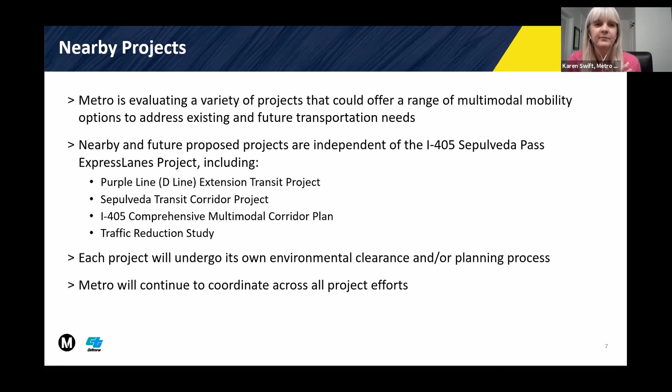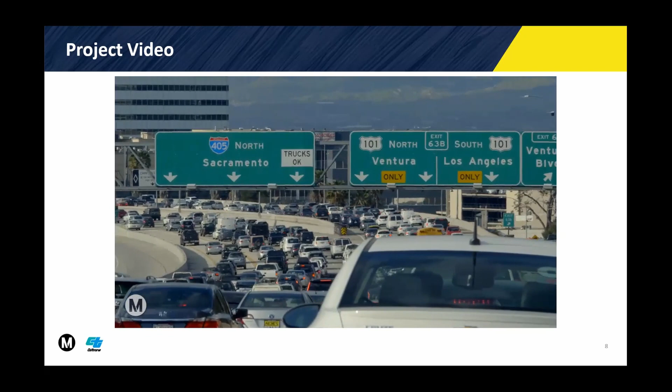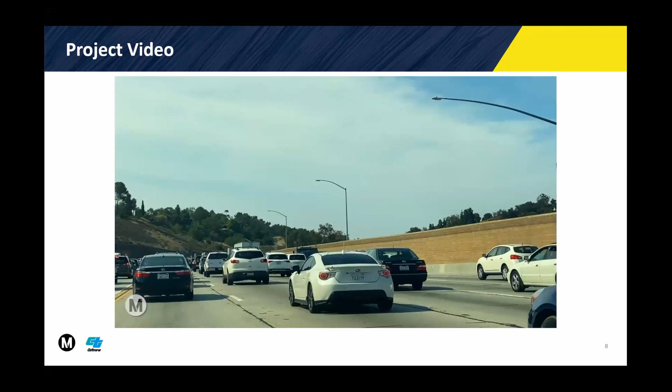So I live in Sherman Oaks and I work in Santa Monica. My commute to work is only about 20 miles, but with traffic, it takes 60 minutes or more. I work downtown and I have to come from Canoga Park, so I have to take the 405 to get to work. Dragging a horse trailer over the 405, it's just a nightmare. It takes time away from your life. If I wake up late, then it's over. You have to leave so far in advance. Sometimes it can literally take 2 hours to go 5 miles over the Sepulveda Pass. My boss is not very happy with me if I'm late, but unfortunately, it's the only route I could take to get to my destination.

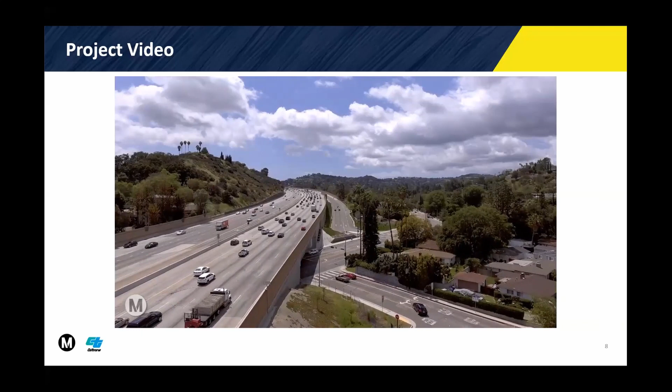The 405 freeway is one of the most traveled in the nation, with traffic increasing each year as our economy and population grow. That's why Metro has a plan to make it easier to get around. The 405 through the Sepulveda Pass is especially challenging and complex, and will need more than one project to improve travel in this area. Along with better transit and other improvements, Metro is planning express lanes for a better drive on the 405.

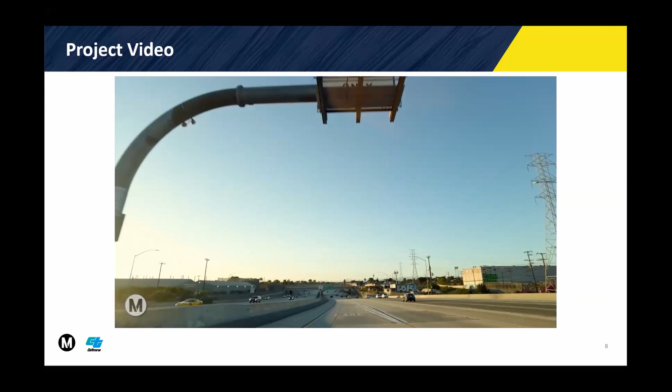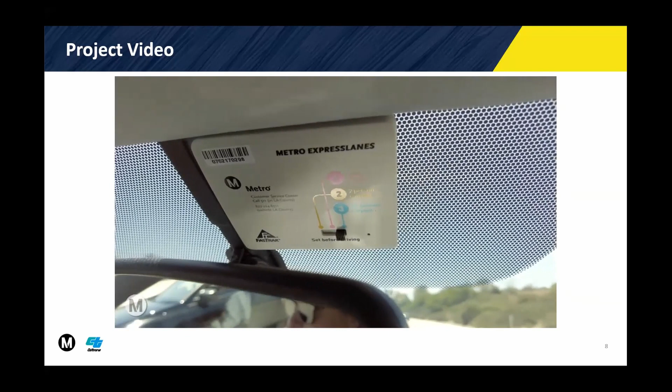Express lanes are managed lanes where toll prices are based on real-time traffic conditions and vary according to the level of traffic congestion using dynamic pricing. To use express lanes, you'll need a FasTrak Flex transponder connected to an express lanes account. Dynamic pricing means that the toll is higher when there is more traffic in the express lanes and lower when the traffic is lighter.

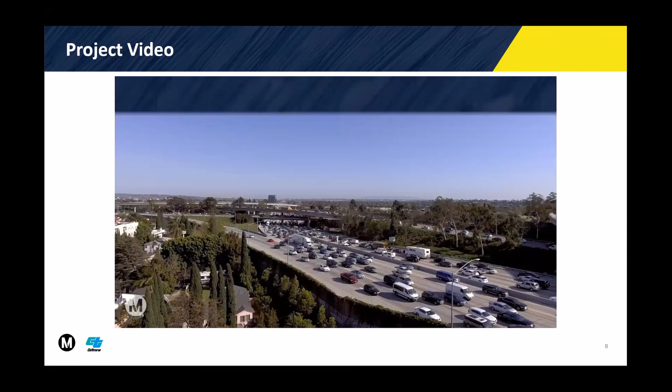Lanes are free for qualified carpools, van pools, and transit vehicles, and tolls are discounted for qualified clean air vehicles to move more people in fewer cars and encourage sustainable travel behaviors. This can help keep traffic in the express lanes flowing smoothly for a more reliable trip.

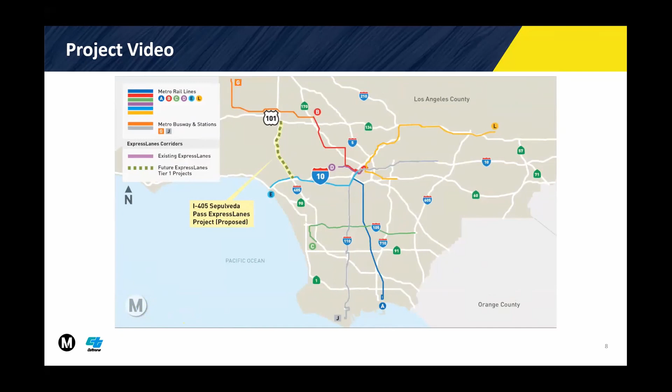The I-405 Sepulveda Pass express lanes have $260 million in funding from the Measure M half-cent sales tax and would add express lanes between US 101 and I-10. These new lanes would expand the existing network of express lanes.

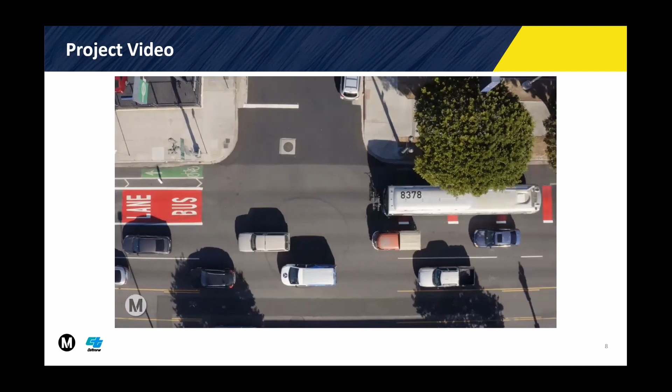Revenue from express lanes tolls fund the operational costs of the program, with any leftover revenue invested into the corridor. This net revenue could potentially fund more frequent transit service and toll credits for transit users. Historically, this net toll revenue has also been used for local transportation improvement projects within 3 miles of the corridor.

The combination of being able to get someplace faster and with less stress on the express lanes, that's just a win-win. So you have a flight that's right at the pinnacle of rush hour, and there was an express lane? Yeah, I would use an express lane, no problem.

My coworker and I commute together so that we can ride in the carpool lane. Having an express lane would definitely benefit me and my coworker.

If I could get credit on my transponder every time I took the subway or the metro, then I would definitely use that. And when I have to go to the Inland Empire with my horses, then I take the express lanes on the 10.

It's a dramatic savings in time and stress. Do it. Anything to make it better.

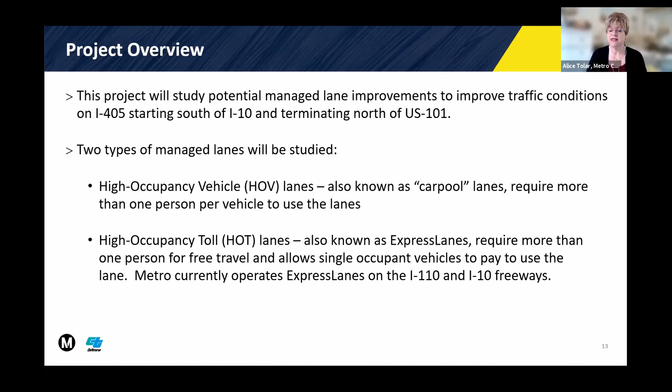Metro currently operates express lanes on the I-110 and I-10 freeways.

The I-405 Sepulveda Pass Express Lanes project is a 14-mile corridor within Los Angeles and unincorporated areas of LA County. We recognize this is a regionally significant project and corridor that impacts jurisdictions beyond the defined project limits. Metro and Caltrans are partners in developing the project. Metro is preparing the planning reports and environmental document, while Caltrans provides oversight and is the lead agency for CEQA and NEPA.

On funding, Measure M is the local sales tax passed by LA County voters in 2016, which provides $260 million for this project. Additional funding sources will be identified as the project advances through the development process. Operation is anticipated in advance of the 2028 Los Angeles Summer Olympics and Paralympics.

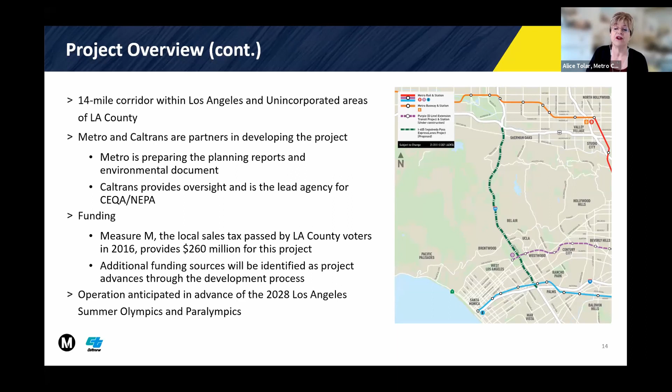A bit of background on the Express Lanes program: for Metro, it was initiated as a one-year congestion reduction demonstration project on the I-110, which opened in November 2012 between Adams Boulevard and State Route 91 and 182nd Street, and also on the I-10 in February 2013 between Alameda Street and I-605.

These express lanes were developed in partnership with the Federal Highway Administration, Caltrans, and California Highway Patrol. The successful program prompted the Metro Board and California Legislature to grant tolling in perpetuity.

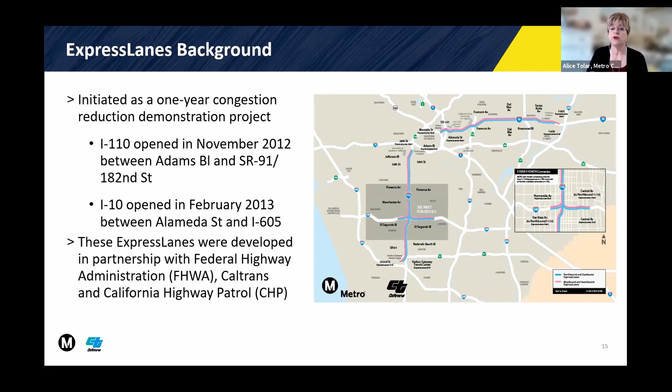Due to the success of the program, the Metro Board directed staff to produce a county-wide express lane strategic plan, studying HOV corridors in LA County and ranking them on factors including technical and physical feasibility, financial feasibility, and opportunities to close gaps in the network. Corridors ranking highest and considered most promising were placed in the Tier 1 near-term implementation category, defined as projects that could be implemented within 10 to 15 years. The I-405 Sepulveda Pass Express Lanes project is one of those Tier 1 projects.

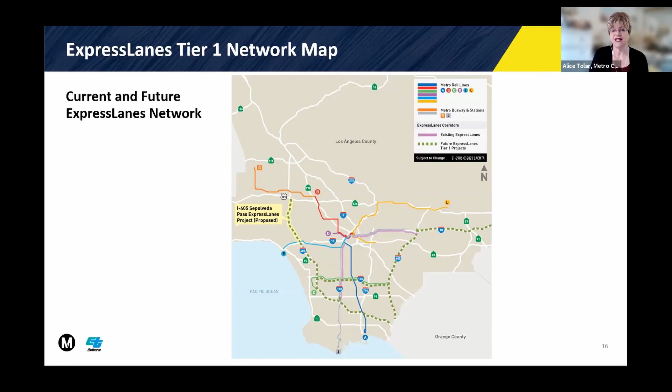Metro Express Lanes are designed to improve traffic flow and provide motorists, including solo drivers, a more reliable travel option in LA County. Express lanes allow carpools, vanpools, and buses toll-free travel with a FasTrak transponder, while also providing single occupancy vehicles the option to pay a toll to use the lane.

Tolls for vehicles that don't qualify for free travel are calculated based on traffic congestion and vary according to the level of congestion, so tolls are higher when congestion is heavier and lower when traffic is lighter.

Looking at this cross section, for those who may not be as familiar with an Express Lanes facility, we show the Express Lanes facility alongside the general purpose lanes. In the lower left-hand corner, labeled number 3, safety is the number one priority for Metro, including with respect to our Express Lanes facilities.

We want to make sure we adequately inform motorists that the ability to enter or exit the facility is coming up. Signs are in place to let folks know they will have an opportunity to remain in the general purpose lanes for the duration of their trip, or choose to utilize the express lanes, giving advance notice so they can make safe moves in and out of the facility. We also want to make sure we include pricing signage, which typically shows the toll associated with utilizing the facility to access the next destination.

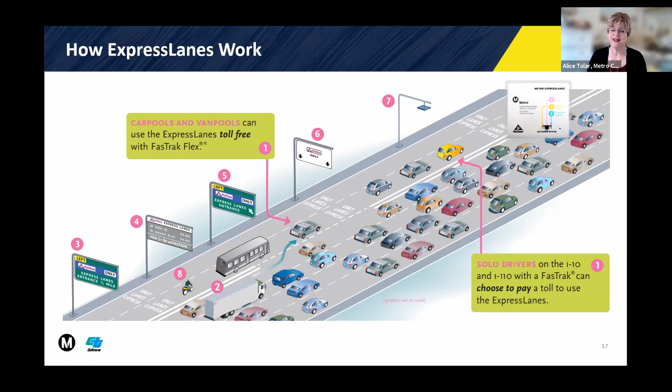So the purpose of the I-405 Sepulveda Pass Express Lanes project is to reduce congestion and improve the overall movement of people and goods on I-405 by providing additional mobility options, improving traffic flows and operation, reducing congestion, and improving overall performance within the constrained project corridor.

Also, we would like to increase the continuity of the regional priced managed lanes network by closing the gaps between existing and planned facilities.

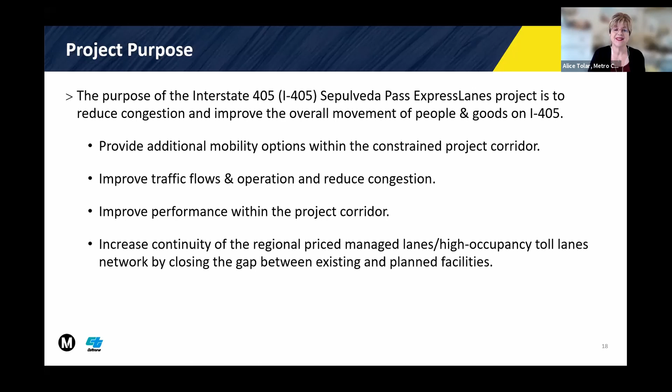So let's talk about the I-405 generally speaking. The I-405 between I-105 and US 101 is one of the most congested highways in the US, with an average of 56 hours of delay yearly per commuter in 2019. The project is needed to address traffic congestion and related deficiencies.

What we know about the corridor is that much of the congestion in the constrained Sepulveda Pass can be attributed to limited existing roadways and limited alternative transportation options, running north-south through the Santa Monica Mountains between the San Fernando Valley and the South Bay/West Side in LA County. Currently, daily traffic volumes of 289,000 vehicles most definitely exceed capacity.

And much of the existing I-405 facility within the project limits is classified as extremely degraded. I wanted to chat just a little bit about this concept of being degraded.

So much of the I-405 HOV lanes within the project limits are not performing as originally intended, as they do not offer trip reliability, travel times, and travel flow, nor productively or proactively manage and sustain mobility within the corridor. The Express Lanes project seeks to ease highway and local congestion, providing a mobility alternative to carpools and vanpools, and choices to single occupancy drivers.

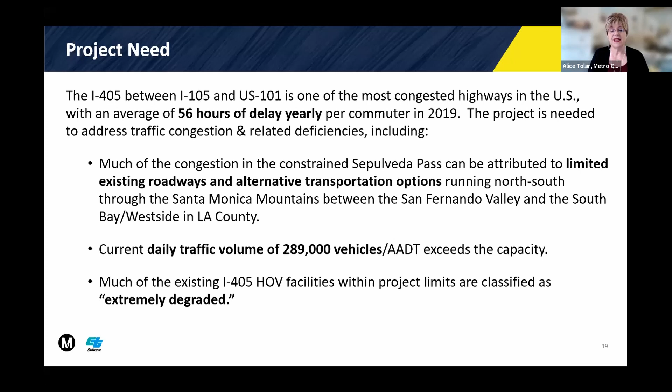So again, much of the existing I-405 HOV facilities within the project limits are classified as extremely degraded.

What I'd like to do now is hand the mic over to our colleague, Jeff Fromhertz. Jeff is from WSP, and they are the technical consultant working now on our current phase of the project, our environmental and project report.

Thank you, Alice. And I think it's still technically good morning. Good morning, everybody. As you've seen the project limits on exhibits that Alice was showing, we just wanted to provide a different perspective, looking at it as an aerial view.

If we split the corridor for the most part into thirds, the southern third, what we're looking at here, starting with the I-10 freeway to the left, is before we go up the grade, still fairly flat, and as you can see, very urbanized between where the Expo Line crosses.

You can see where Santa Monica Boulevard and Wilshire Boulevard are, and we have a few very important features along this stretch of the corridor, including, to the west of the freeway, the VA complex just south of Wilshire Boulevard. We have the National Cemetery just east of the freeway, north of Wilshire Boulevard. We also have the Bad News Bears baseball and softball complex right up against the freeway itself.

So it's a very urban area. These are just some of the conditions we'll be looking at as we develop our preliminary designs, and we'll get into the alternatives in a minute.

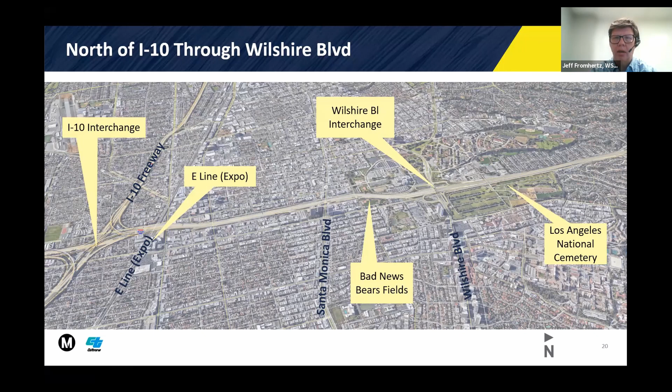The next slide shows basically the middle third of the corridor as we're starting to get up the grade going northbound, with Sunset Boulevard to the left. We have the Getty Center, the entrance, and the museum itself on the west of the freeway. We have some large water tanks near the top of the grade that serve the communities, and some existing retaining walls that were recently built. We also have the Skirball Cultural Center to the right of the photo here. So this is basically near the top of the grade, through the grade.

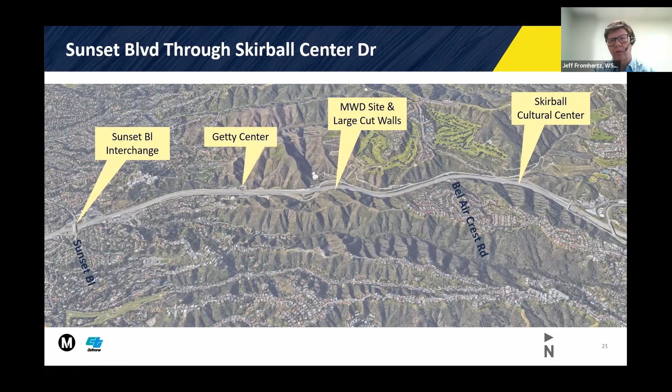The next third, the northern third of the project, on the next slide you can see coming down the grade, again gets into a very urbanized condition at the bottom of the grade. We have the Mulholland overpass that was built as with the last project. We have Sepulveda Boulevard that traverses, for the most part, parallel to the 405, either on the east or west side of the freeway. It does cross several times underneath the 405. Our northern limits are at the 101 interchange where Ventura Boulevard crosses over, and the mall. Just north of our project limits is where the Sepulveda Basin and the LA River cross under the 405. So that's just to give you a feel of the project conditions.

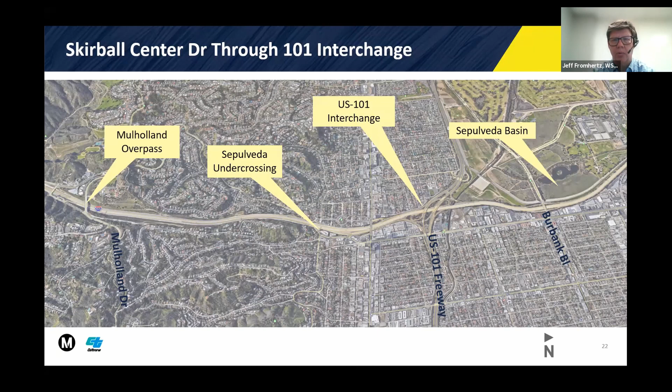Now the next slides, we're going to talk about what we're planning on studying during this environmental phase, as Alice was mentioning. What we start with on environmental documents is called the no-build alternative, or alternative 1. The no-build really represents the existing conditions that's out there today. But we do look at how the existing conditions will perform, not just today, but in the future, as we compare our other alternatives. So it represents what would happen if no action was taken. It provides a comparison point to understand how the impacts of the other proposed alternatives compare to the no-build.

Currently we have 4 build alternatives under preliminary consideration. The point of these meetings, and today's meeting, is to get some input and comment. This doesn't mean these are the only alternatives we're going to study for the project, but these are the basic ones. There will be hybrids, there'll be variations as the project team develops, as the project develops as well. So it's very important at this stage: no alternative has been selected. We have not even begun the analysis of alternatives, and no determination has been made to proceed with improvements or any of the alternatives. As such, no potential impacts or even property relocations have been identified at this point.

So what you'll see on the next slide are really just schematics that show the existing lane configurations. They're not really even meant to show widths, but they just basically show the lane configurations we're going to be looking at. Again, what we're showing on the screen right now, alternative one, is basically the existing condition. The lanes that are not carpool lanes we call general purpose lanes, where the cars and trucks travel. The very outside lane is sometimes called an auxiliary lane—that's a lane that is sometimes between one ramp and the next, but is not a continuous lane on the entire freeway. And then in the median is where we have the HOV lanes, the existing HOV lanes. So again, that's the existing conditions.

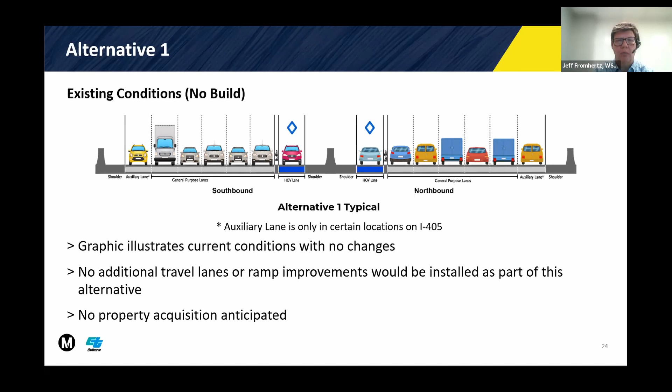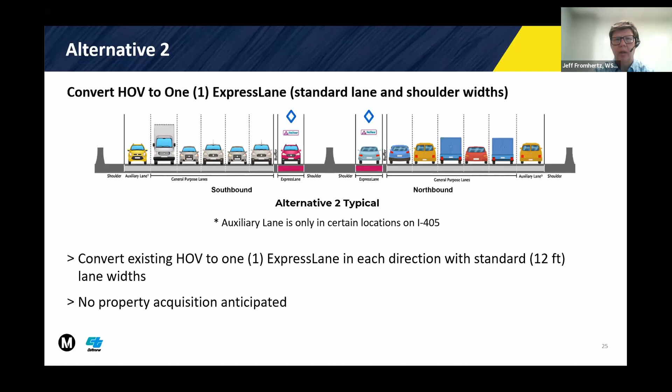Alternative two, what you'll see next, is again basically the same number of lanes that is out there today. And by the way, none of these alternatives would remove any of the general purpose lanes. So what we're looking at is a difference in the median between the existing carpool lanes and our proposed express lanes. In alternative two, we would convert the existing carpool lane to one express lane and maintain a buffer, but you would need the FasTrak and the transponder, as Alice was saying, to utilize the express lane. This would not have widening either, since it's the same lane configuration out there today, so no property acquisitions would be anticipated. When we say standard lanes, that means we're maintaining the lane widths that are out there today—most of the lanes that cars and trucks are on are 12-foot lanes today.

The next slide, alternative three, is where we start to look at where there's opportunities and available right-of-way width to install a second express lane.

So we would convert the existing carpool lane to an express lane and also put in a second express lane, giving us two express lanes in both northbound and southbound directions. This alternative would minimize or reduce some lane widths, maybe by 1 foot to 11 feet, and reduce some existing shoulders to allow us to put in a second lane and minimize the widening required. It's also important that the outside lanes that trucks travel on would still remain at 12 feet.

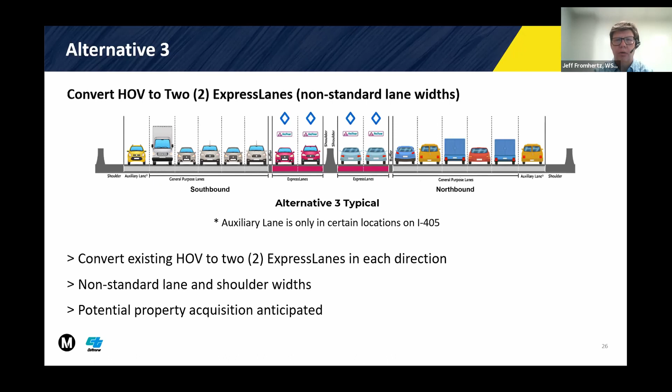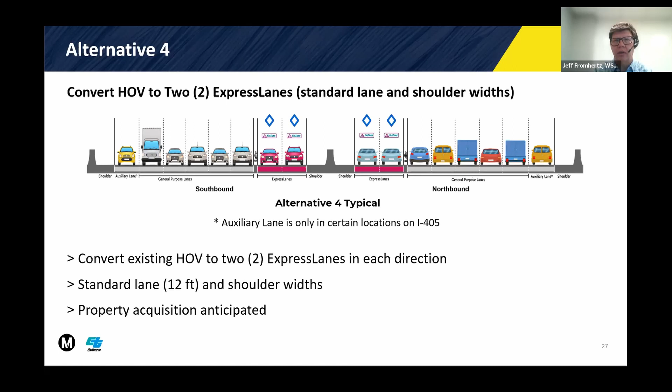Alternative four has a very similar lane configuration, but maintains standard lane widths, 10-foot shoulders and 12-foot lanes for all lanes across the freeway. This would be the same lane configuration as alternative three, but require additional widening to maintain these standard widths, so there would be some additional widening and property acquisitions required. Again, none of that has been determined, where or what specific locations. We have not started that process.

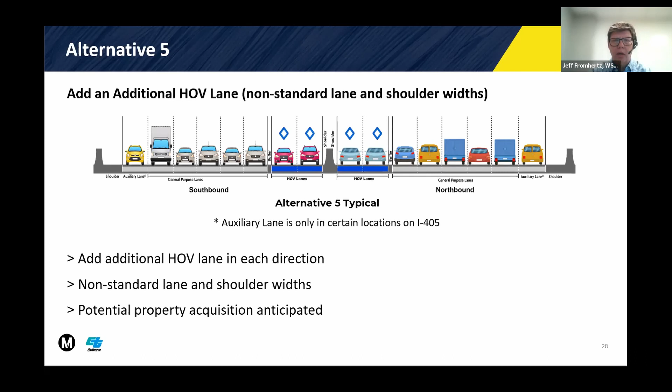Thank you, Jeff. So again, speaking of the reports being prepared, we've talked about the environmental and the project report. The environmental document analyzes potential environmental impacts and identifies mitigation measures. The project report is the engineering document, detailing facility design, traffic analysis, project costs, and that type of information. We'll also be preparing a concept of operations report, describing how the express lanes will be designed and operated, including operational policies, tolling infrastructure, and facility design.

Additionally, a traffic and revenue study will be conducted, analyzing potential revenue and toll rates for this project. Another activity that will need to take place deals with our partnership with Caltrans. Metro and Caltrans will need to apply for tolling authority through the California Transportation Commission, the CTC, in order to implement express lanes on the I-405.